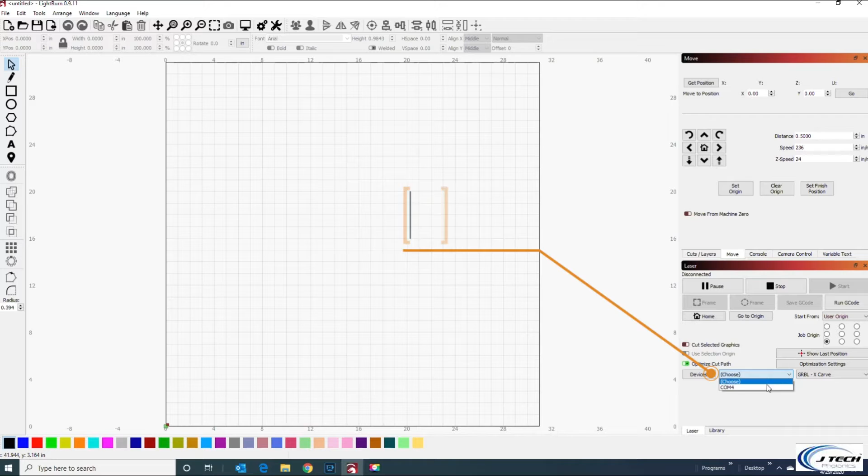So we have it — we already had an Acro here, and now we have this XCarve. If you click on this one, you can see you can make it your default if you have multiple machines. Let's go click on this one, and you'll see you can go down here, and the grid's a little bit bigger on our XCarve version, and we can connect to it by selecting COM4. In this one we're going to go through, and I'm going to show you on our smaller Acro machine.

We've set up for this video with the JTech Acro machine, which is a little bit smaller. So we're going to select that one here, and we're going to go COM4, and you can see it says ready here. That means that you've connected to it.

So it normally says waiting for connection, port opened, and then it shows you your GRBL version. We're going to check and see what GRBL version you have. In this case, it's 1.1F. We're not going to upgrade this one right now because it's already 1.1F.

But if you do need to upgrade it, we'll show you another video on exactly how to upgrade it, with step-by-step instructions on how to upgrade if you don't have the firmware. You can see right here, it says if you need to download the firmware and then download the X loader.

Okay, so we're going to do a couple things here that we need to look for. Now that we're connected to the machine, port's open and we're connected, let's go check what we want for our units. Go up here, and it's probably going to be on millimeters per second or one of these other ones when you first start out. This is what you need to do.

Over here on Better for Diode, you can either do millimeters per minute or inches per minute. If you're a metric person, choose millimeters per minute. If you're an inches guy or gal, choose inches per minute. I like inches, that's what we normally talk in here in America, so we're just going to choose inches and say okay. Everything else on this page is pretty okay.

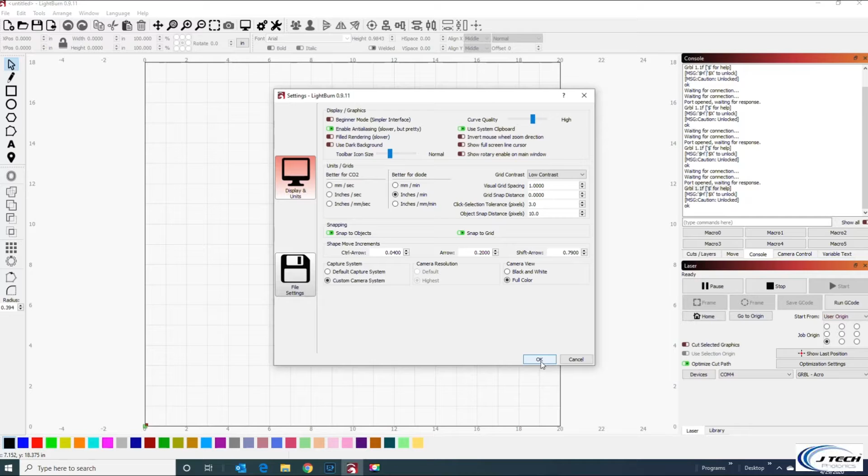Then go over here to the device settings, and let's make sure our origin is still in the front left. We'll see our S value max is 1000, and we're going to enable our laser fire button. This will have the fire button on the move page, which will be good for us. So we're going to do that.

Once you enable your laser fire button, we need to restart Lightburn. So we're just going to shut down Lightburn, and then restart it again.

All right, now that we restarted, you can see it automatically connected. If you are having difficulty connecting to your machine, look down here and see if it has a COM port. If you have not turned on your machine before you start Lightburn, you will not see a COM port down here, and it will not connect. Make sure you connect to your machine and start Lightburn after your machine's turned on. If you don't have your machine turned on, just restart Lightburn, and the COM port should pop up here.

If you still don't see a COM port, that means you have either Easel or Carbide Motion open and something else is already connected to your machine. In that case, just shut down Carbide Motion or Easel or any other program you have running, and only open Lightburn, and you should be able to see your machine.

All right, now we're going to finish up the console and check some of our firmware settings. In order to do that, in the console here, type the command, a dollar sign, press enter, and you're going to see a bunch of settings here. These are firmware settings for your machine. You can see them here.

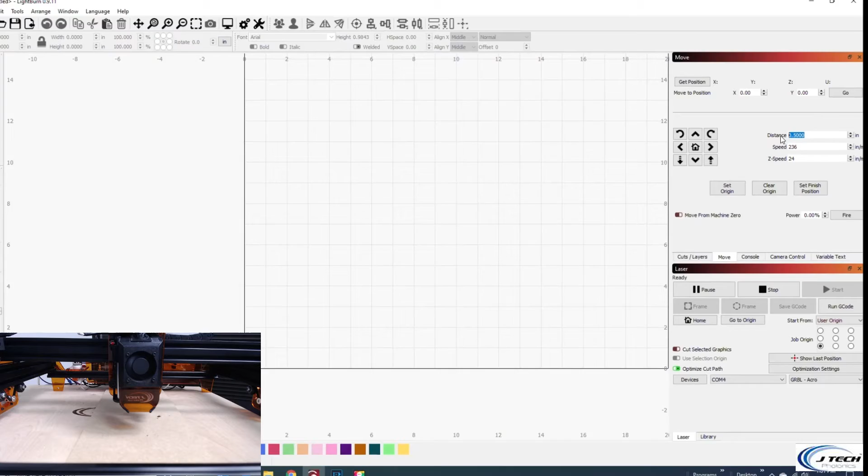This distance here is going to say how much of an increment these little buttons are going to do to move your machine. Right now it's at a half an inch. For X and Y, this is going to be good - you can put it whatever you want, an inch or whatever you want to do. So if I move the machine this way, I can see the machine moves that way. So Y goes this other way, X back and X forward.

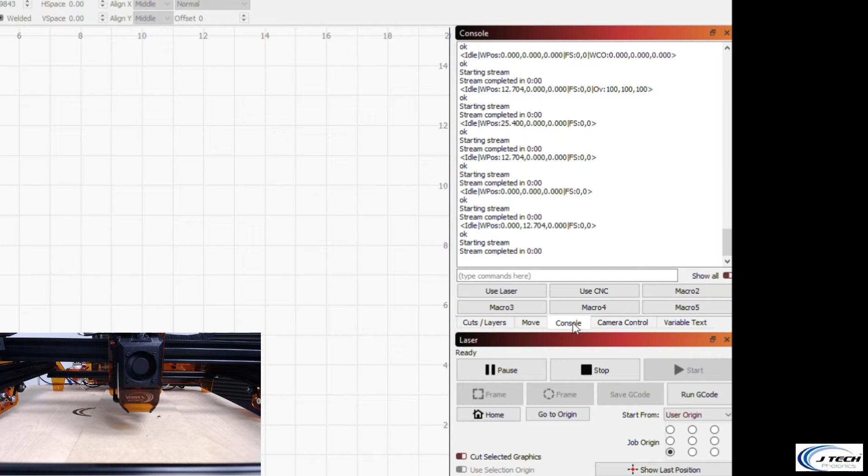If these are wrong, there is a GRBL firmware setting that you can change. But on the Acro machine, some of the easier ways to do it is just to change the orientation of the cables on the GRBL board - you can just swap them and reverse them. If you want, there's also $3 in the firmware settings, I think, that's for your direction. But on most of these, if you already have it running on, like for Easel and Shapeokos and for X-Carve and Shapeokos, if you already have your machine working, then that's just going to work. So just check that and see if it works.

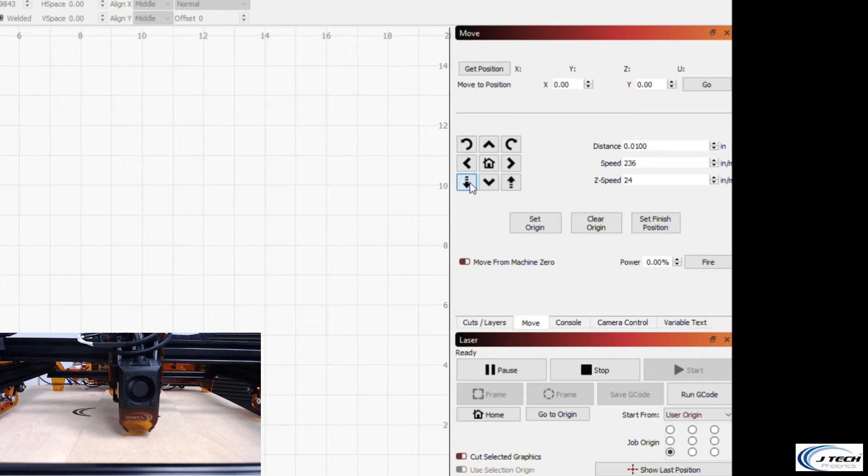If you're going to then move your Z-axis, sometimes a half an inch is going to be a little bit too much. You can get it into place and then maybe go like 0.01 or something like that and move your Z-axis. In this case, we have a little bit of room, so we can still do that. We're going to go 0.5 and get it down to almost a half of an inch.

Then when you get down to the bottom there, you can get it even more and get it closer. We have this little focus set tool that we can just put on - that's a half of an inch, so we can just go down until it just about hits. You can see it just about hit, and that already hit, so I'm going to go off of it a little bit and make sure that you can still kind of get it underneath, but you want it to be a little bit more.

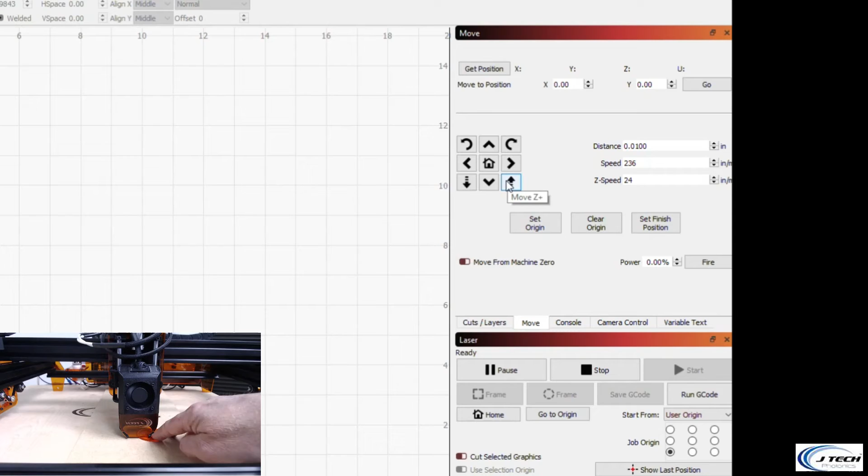Okay, that's on it. You can tell when it's on that it doesn't come off, so that's on it. So there you go, that's perfect. Now we're set to half an inch above the work surface, and that's how you use your distance setting. This is the distance for X, Y, and Z. This is Z down, this is Z up, so that's that.

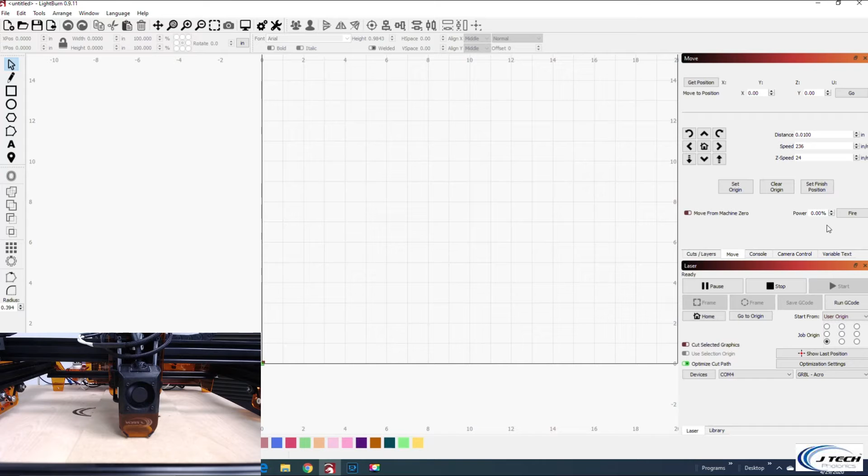So the next thing we have to look for is the fire button. The fire button's right here. This will fire it in low power mode so you can see where the position of the laser is. Typically it's somewhere between 4 and 6%. So I'm going to try 4% here and see if ours turns on. And yep, it turns on, you can see there's a little bit of a light there.

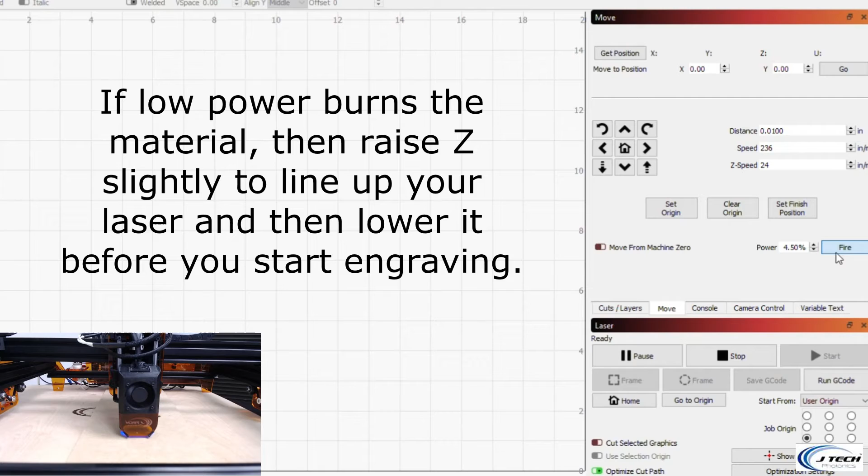If it doesn't turn on, you can go higher power. Ours is getting brighter and brighter as you increase power. You can see it starts to burn, at around 5 or so on some woods, so you have to watch out for that. But you can see it turns on and off, and this is really just to make sure you can see where the laser is when setting up your workpiece.

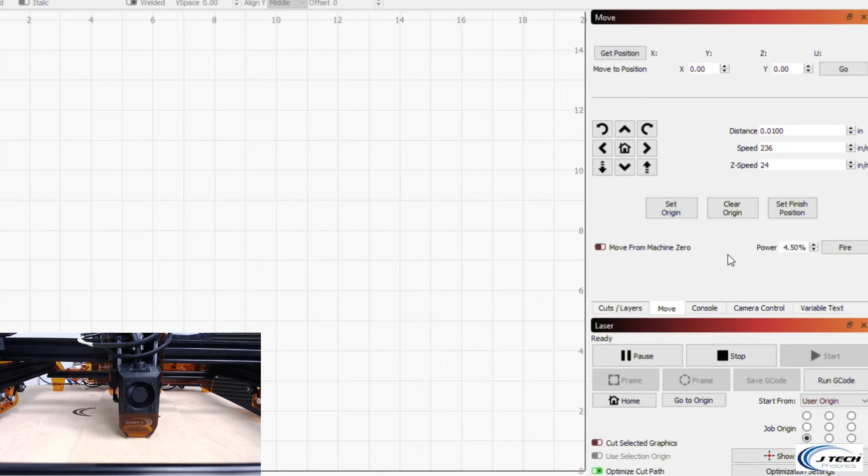If you go all the way up past 6% here, that means you have a settings issue. You didn't set this $30 equal to the S value max, because then the percentages are going to be off. Or if it doesn't turn on when you press fire even over 6%, then you might have a problem with your cable from the laser driver to your controller, your X-Carve or your carbide motion board. So in that case, give us contact us and we'll help you through it.

All right, so let's now try putting some text onto our grid here. Let's just type out hello, and you can see we have this hello here now. If you highlight it, you can go up here and see the width and height. You can keep the aspect ratio on by locking this. So if we wanted to make it a little smaller, let's make it maybe 1.5 inches. That's how you resize things - you just say 1.5 inches and click somewhere else and it shrinks down in size.

Go to the Cuts tab, Cuts Layers tab, and you'll notice this is the layer here, the black one that we have. You can change layers and change different colors - that's highlighted again so you can. You can change different colors if you want, and each layer represents different settings, so you can have a bunch of things on your workpiece with different parameters to make your objects look nice.

If you have a logo or something with a bunch of different stuff on it, that's the different layers you'd use. So first let's look at line. If you double click on this, it's going to default to really high speed - in this case it says 239 inches per minute. That's going to be really fast. For most of our lasers, it's going to be somewhere between 50 to 120 inches per minute. The 7 watt has a sweet spot around 80 inches per minute at 80% power.

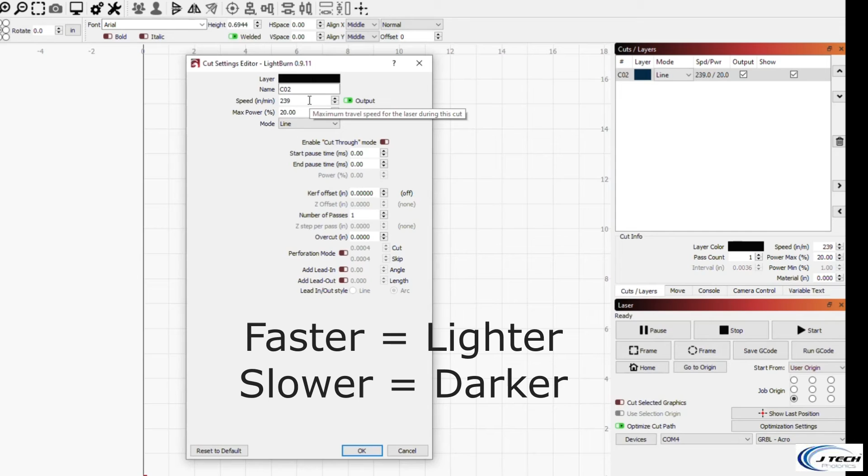So let's go in here and change that - this is going to be way too fast. The faster you go, the lighter it's going to be; the slower you go, the darker it's going to be. At some point it'll go so fast that the laser won't even have enough time to burn anything. If your engravings are kind of splotchy and you can't even see anything burned, that means you're going way too fast.

So let's try 80 and 80 here on this outline. All this other stuff you don't really have to worry about - if you want to do a cutout, this number of passes is kind of important because it just keeps going over and over again. But let's press OK, and we can see the preview button, this little TV thing. We can see that it's just going to do an outline of 'hello', and it's going to take something like around 8 seconds.

This estimated time is not necessarily correct. We'll get into that a little bit later.

Let's try instead of a line mode, let's do fill plus line. Let's look at those parameters over here. So we have 80 and 80.

The big thing on this is the distance between these lines, and that's your line interval. Line interval really is somewhere around 0.006 for a lot of woods. If you notice white spaces between each of these lines, that number is a little too big. If you notice it's getting really dark and overlapping, that means the number is too small. Somewhere around 0.006 to 0.007 is a really good number.

If you make this too small, it's going to take forever to do a project. So you try to maximize this number to be as big as you can and still get the quality you like. There's some cool things you can do with this too.

You can also do different angles, like a 45. The other thing to note here is you can do a crosshatch. That's really good for some projects where you want really good detail, because this will get rid of any of the little artifacts that lines going back and forth will cause, since you have the other way crossing it, making a nice, more even approach.

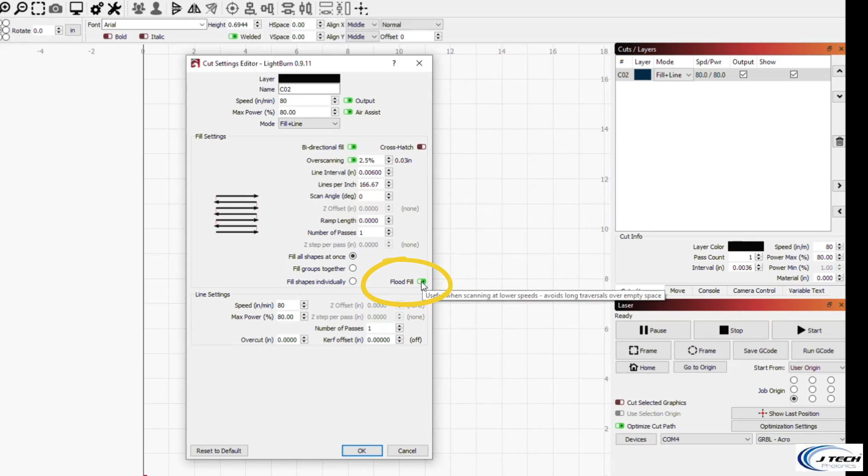The only other thing to note here is flood fill. If you turn this on for really large engravings that take like 4 hours or something, flood fill can really reduce your time, because it won't do just a straight raster back and forth, but will actually optimize your toolpath. That's good for later if you have a really big design—try turning this on and see if it saves you some time.

For this one, it's just a basic hello, so I'm going to just do the standard. Let's go look at this preview now, and now you see that we have it outlined.

I don't know why this overscan is on. Actually, I'm going to turn that off—you don't need overscanning. If you have GRBL 1.1F or higher, you do not need overscanning, that's just going to waste time. So let's go see... I got that overscanning turned off.

You can look at this and see it's just going to go back and forth and do all the hello first, and then afterwards do an outline. It says it's going to take us about 1:44. If we had done the flood fill on this one, I don't think it's going to save much time, but you can see it's not going to raster back and forth—it'll do the O a little bit first, and split it up into what it thinks is the fastest amount of time. In this case, it looks like it saved us maybe 30 or 40 seconds.

In larger designs, it's going to save you a lot more time. On these small items, I kind of like it just being back and forth because it turns out a little bit better on the smaller stuff.

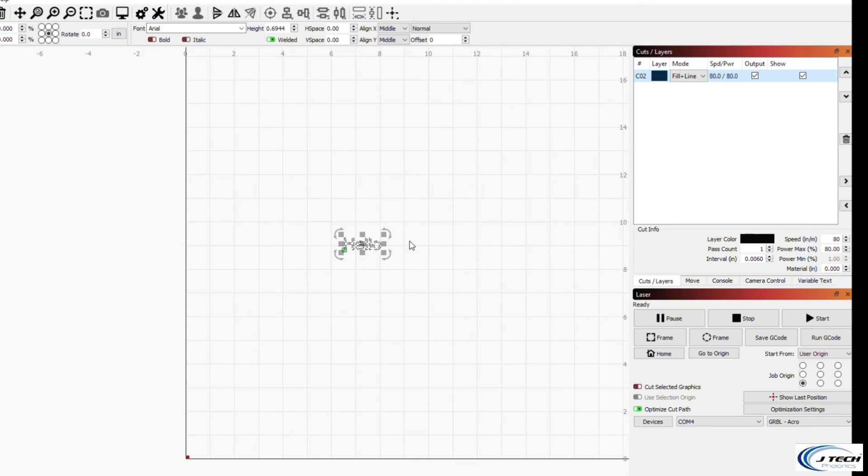So the next thing we're going to have to do is position this on the wood. All right, let's get this positioned on our board. If you want to check, there's this get position button up here.

You can press that, and it says 0,0,0 because this is exactly where we started Lightburn. So wherever Lightburn starts, it's going to put it at 0,0,0.

If you want your bottom left corner to be 0,0,0, you can simply home your machine down there and restart Lightburn, or just move it to the 0,0,0 position. There are a few options to start. Look down on the right and you can say absolute coordinates, which will put this little green dot down by the left here. I don't really recommend it because for most things you want to position it on the wood, not position the wood based on the machine.

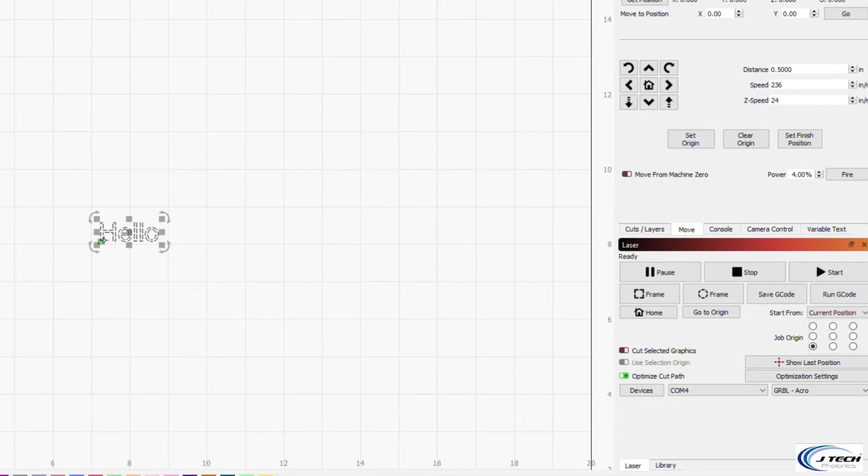Everything else we normally do, on Easel and Carbide Motion, is current position, which means you can set your job origin. A lot of times it's bottom left, so you see how it's on the bottom left right here? That little green dot shows where the laser is going to start. You can set it center, top right, wherever you want.

I tend to do center a lot because I like to find the center of my piece of wood. We've already marked with a pencil the center on this little piece of scrap MDF, and I'm going to move my laser into position at that center.

I'm just going to move it a little bit to the right to line up. I think it's going to line up, and I can press this fire button. It's going to line it up. I need to move it a teeny bit more, about half that space. Let's see, and firing it... and yeah, that's perfectly on that little spot in the center.

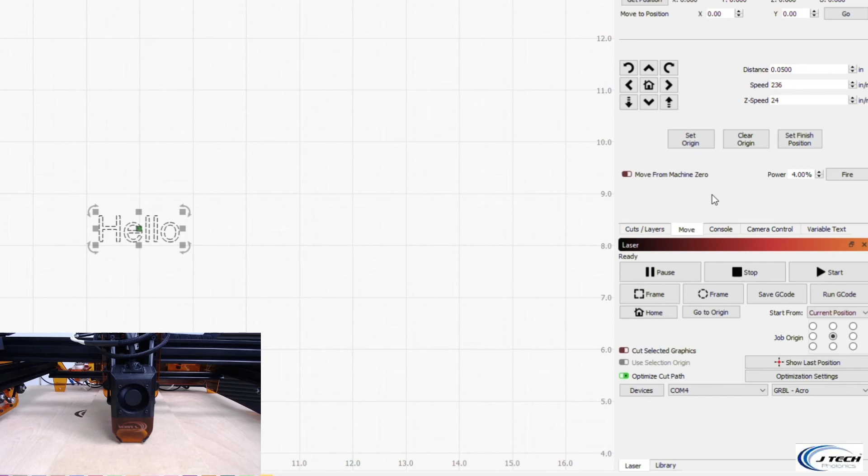So I've lined mine up and put it in the center of that board. We're going to do another video on orientation and all the other job origin and absolute coordinate positions, so check for that. But for right now, let's just use current position because it's super easy to use.

So we're going to use current position. One of the things we can do now is the frame button. Frame will actually outline your drawing and engraving onto the wood.

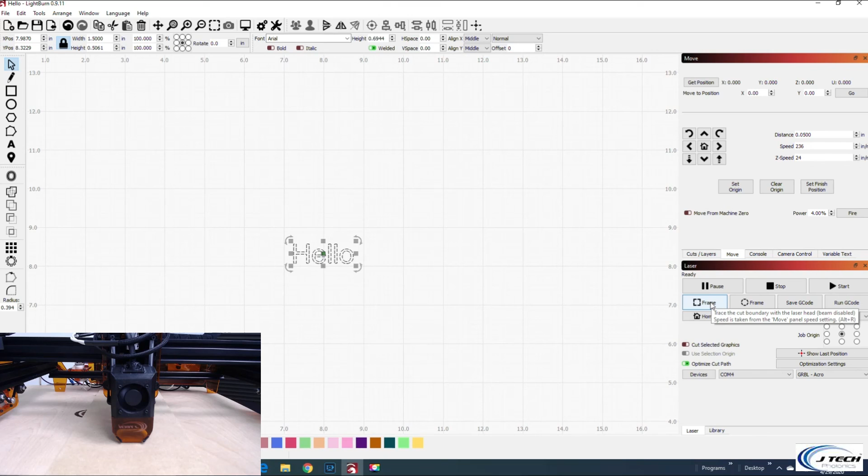You can press the shift key and it will do it in low power. We're going to hold down the shift key and press frame, and you'll notice in low power it's going to frame out where that 'hello' is going to be. That really helps you figure out exactly where on your wood you are before you start your engrave, so you can get everything lined up perfectly.

Before I press start, I'm going to talk a little bit about fume extraction. If you live in a place or a shop that has a lot of ventilation, that's fine. We recommend venting to the outside through ducting or something like that to get all of your smoke outside.

If you can't vent outside, you can use a new shop vac — don't use one that has dust in it — and get a charcoal filter pad from Amazon or Home Depot. There's a small Home Depot shop vac, the Stinger, for about 34 bucks, and you can get a charcoal pad for another 8. Then you can have a little indoor smoke scrubber.

We're going to do that with ours, so you'll hear a vacuum for a little bit. But I'm going to go ahead and press start here because we've already framed it, and let's see what happens.

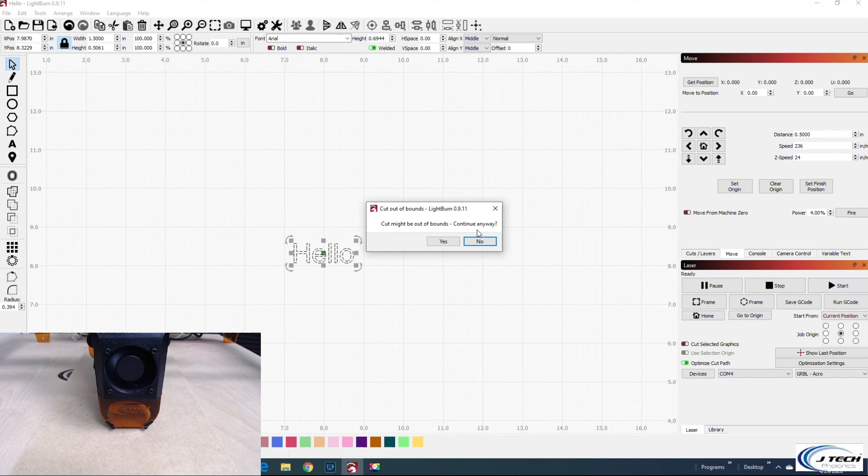Now it's going to say the cut might be out of bounds, and that's because it's going into the negative coordinate space up here since we didn't set our 0,0 position to that bottom left corner, so it thinks maybe it's out of bounds a little bit. It's just making sure you actually check whether you framed it and it's not going to hit anything. Since we did that, I'm going to press continue anyway.

And here we go, so it's engraving as we speak, and I'm going to turn on our dust filter, or our smoke sucker.

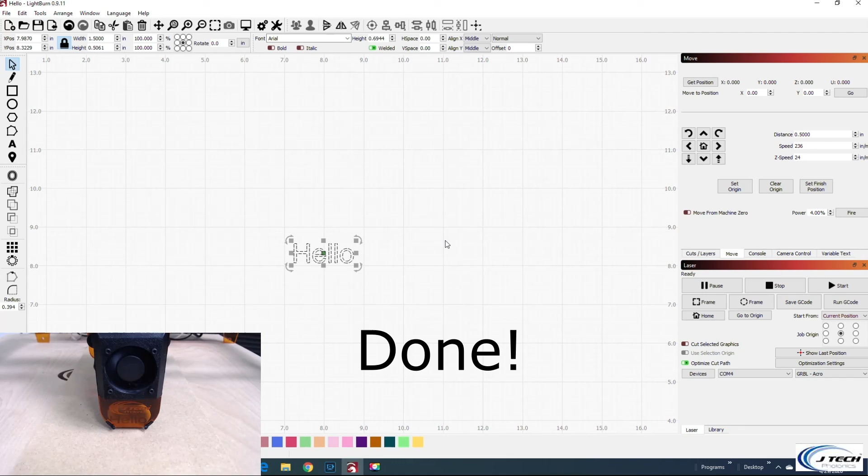Alright, so let's see how that looks. Looks pretty good.

So there's how to set up Lightburn for JTech lasers on GRBL machines. For more information, please see jtechphotonics.com and check back for more exciting videos on learning Lightburn.